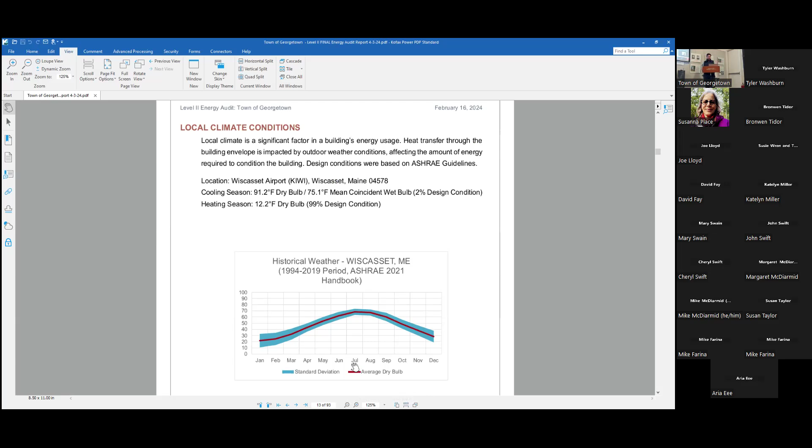Next section of our report is all existing conditions. So this is what kind of takes the longest to figure out, is what's there. We try to recommend things that are practical. So we don't want to recommend something that can't be built or can't be done. So that's our view. So we look at this as if when we do the energy audit, even though it's not engineering design, we look at it as if we were the engineer, could we do this here? Would the system work for you?

So we did this. I will go through this relatively quickly, but we looked at everything that uses energy. This wasn't really a resiliency study, so we didn't look at that side of things. And I think some of you may have some questions about that, which is great. But this was really focused on energy use.

So here's all your systems, and this is how they're controlled - heating, cooling, domestic hot water, looking at the town offices. We're looking here at some hallways, classrooms, unit heater spaces. We went all throughout the building.

This is down in the basement. We did go in the basement, spent some time down there. We figured out how the boiler plant works and how it's controlled.

There are many things that can be done with controls to help energy use. The good news is you've done them already. It doesn't let me put it in my report if you've done it already, but it's great for the town. So it's great that you guys are doing that.

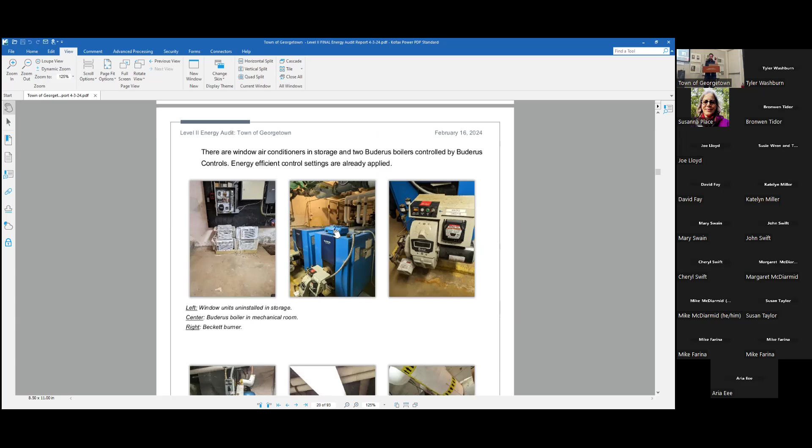This little guy, you can see my mouse - this little blue box on top of the boiler is the control. That's the brain. So we opened that up, looked at the LCD screen, clicked through all the menus and captured all the set points so we could understand how it was working.

We also took a list of equipment and we are able to give you guys model numbers and quantities if they're visible. Sometimes with the circulator pumps, the model was rubbed off, so we couldn't see what it said. But for the equipment we could see, we wanted you to have this. So if you are doing maintenance planning in the future, you can hand this report to a maintenance contractor and they can at least get a start.

We did the same thing for building envelope. I kind of skipped over this, but when we look at a building, we look at it as a whole system. So we're looking at the mechanical systems - heating, cooling, ventilation. We're looking at building envelope, which is really insulation, air sealing, stuff like that. We also look at...

lighting that uses energy. We look at the pump motors and we look at water and sewer. Now, in your case where you are on wells with septic systems, there's not cost savings from doing water and sewer. So we didn't go too far down that road, but we did look at it.

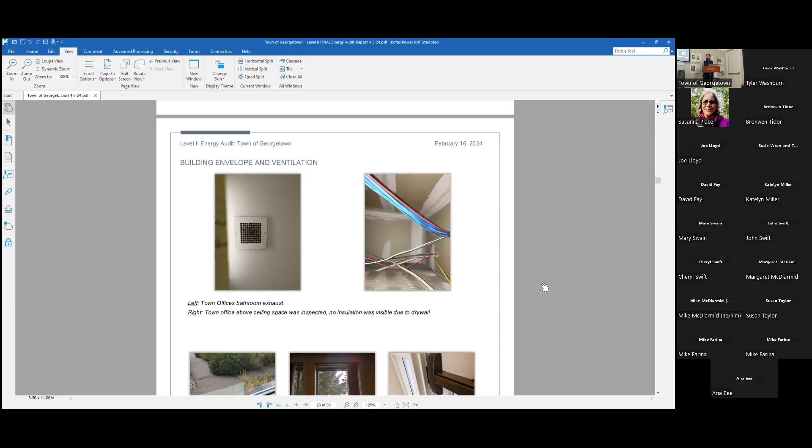We looked at all the windows. We went up in the attic. You've got blown-in insulation. Your ducts are insulated - that's a good thing.

Looking here in electrical works. And again, here's your list of equipment.

Lighting - we did a lighting survey, so I'll skip to the end here because you don't want to look at a bunch of pictures of lights, there's a million of them. But here's the lighting that was in the building. We counted them all. I'm not going to say we couldn't have missed one or double counted somewhere - it's pretty hard to count lights, but this is our best effort at doing it.

Water and sewer, as you can see, we looked at that, but I already mentioned why that wasn't a huge priority, just due to costs.

So we did the same thing at the community center. This had a little more exciting findings around envelope. Here's how the building is heated.

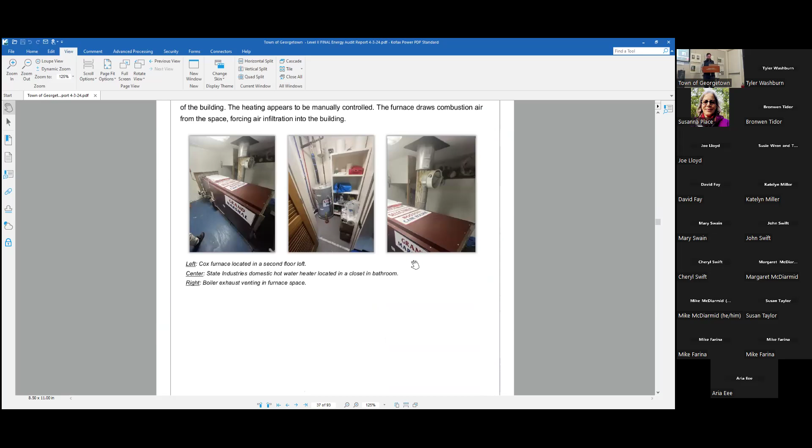For those of you that have been in the building, we've got this oil furnace that just blasts out heat - and that's actually kind of good for the way you use that building, where it's not occupied all the time. Having a big system that can heat up the building quickly when you use it is good. If that building were occupied regular office hours or even 24/7, that wouldn't be the best system because it's not the most efficient.

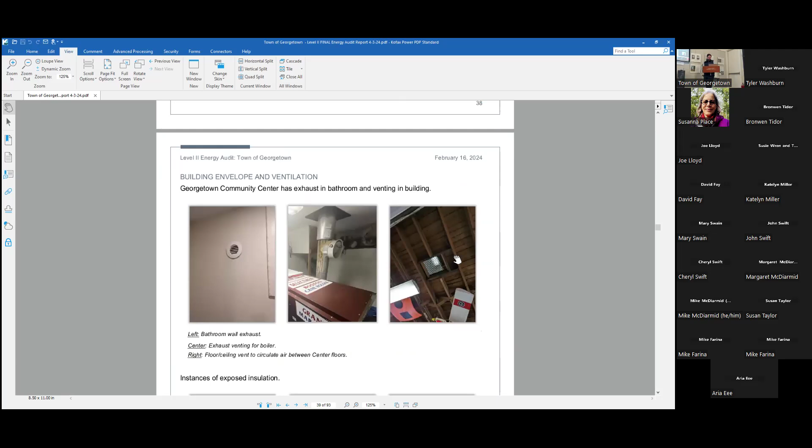Building envelope here - so we found some areas that we got the vent in the floor that lets the heat go upstairs. We did find, let's see if I can find it.

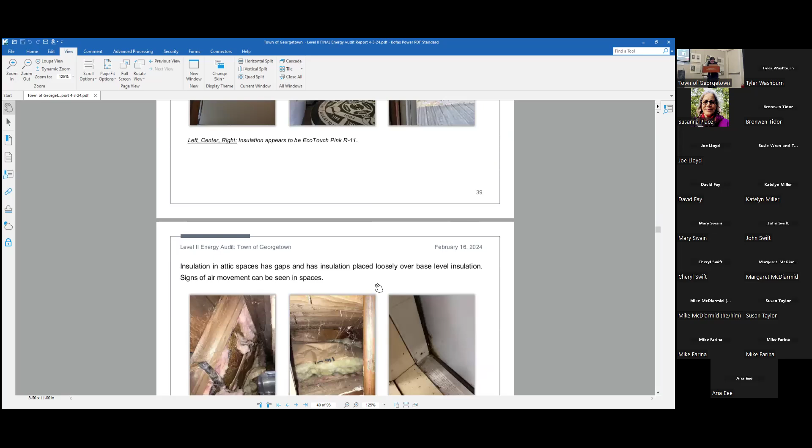Yeah, here we go. This is what I want to show you because you can use this on your house too. So here's some shots. This is a gambrel building, I would call it, or maybe you would say this is the inside of that gambrel roof. Okay, what we're looking at, that's the stud there that holds it up. And here's the insulation, and this is sort of the passage into there. You can see in the photo the cobwebs in there. So anytime - now that's nothing against cleanliness.

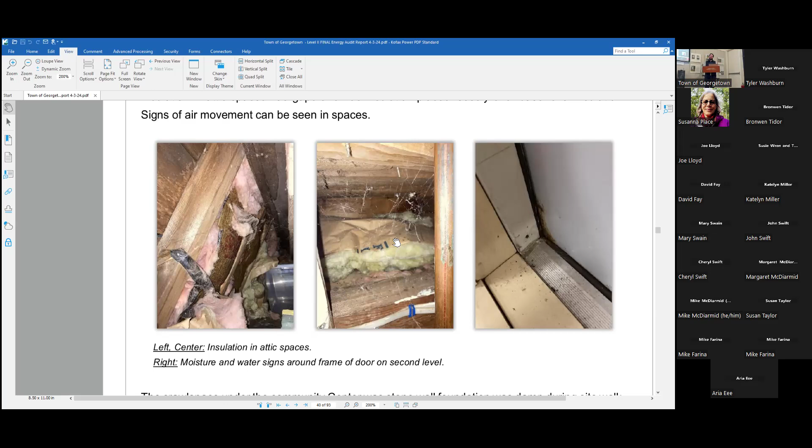I have cobwebs in my house, so I'm not being judgmental. But what I want to share with you is if you see a cobweb, it means air is moving. Spiders are lazy and they build their webs in areas where air moves, because that's where the flies go and then they eat them. So anytime you see a cobweb walking around your basement, it means air is moving there. That's something we can choose to stop or not.

But we did find it, and I just wanted to point that out. I thought that was cool. For my job, that's cool. So maybe you're not excited, but I am.

That was pretty neat. Again, equipment surveys, lighting. We did a lighting survey at all the buildings. I'll scroll through that, and here you go. So here's our lighting counts. This one was complicated, there's lots of different types of lighting in a community center.

Water and sewer, we looked at that as well. Existing conditions, so here's the fire department building.

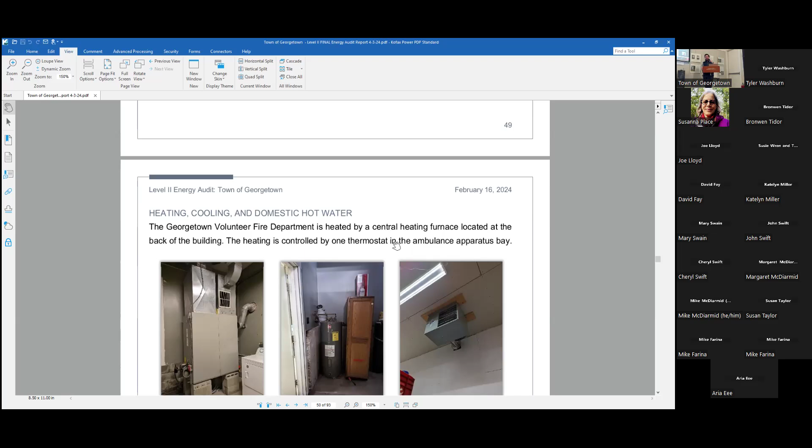You'll notice these are all in the same order, they're all presented the same way. That's done on purpose, so as you're flying through the report you can jump sections. You can look at it however you want, but everything will be ordered the same way. And the order the buildings are presented at the beginning of the report for each chart is also the same order that they're in the report. So we tried to be very consistent with that intentionally for ease of use.

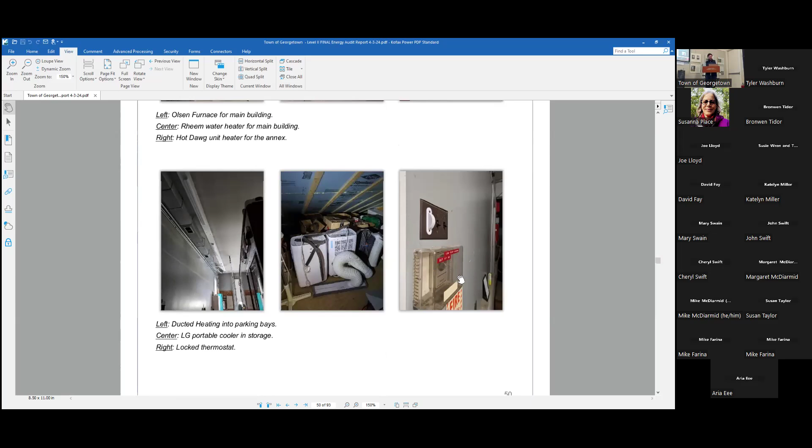So here's your heating systems, hot water systems. Here's the control, I love this, that lock, don't touch it. I used to be a firefighter, I know firefighters mess with stuff.

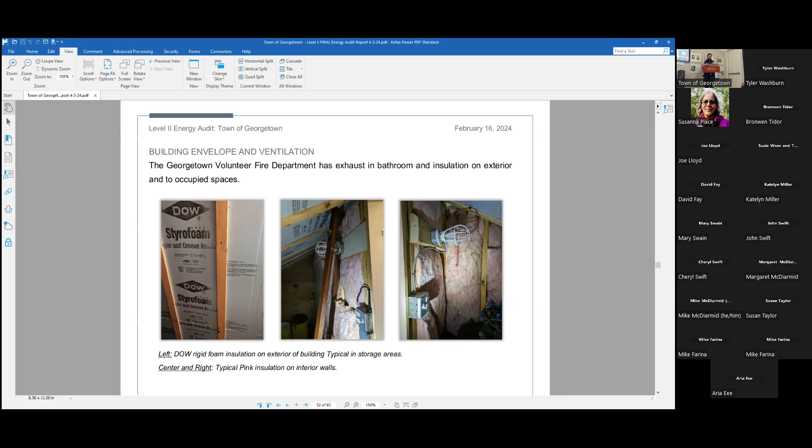So I just got a kick out of that. Here's your equipment survey, building envelope and ventilation. This is a little bit more advanced here. You can see we've got some rigid foam in here. We still have some pink insulation. Pink and yellow insulation, they're both fiberglass, they both do the same thing. So you might have noticed in the other building it was yellow, in this building it's pink. It's still fiberglass, it still does the same thing.

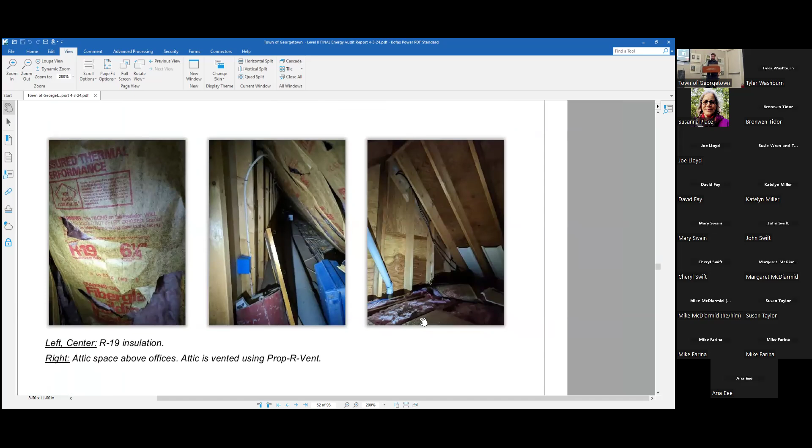All right, here's a good thing I'll point out. We want attics to be vented. So where my mouse is here, this floor space, that's what we'd consider the thermal barrier. It's really the back side of the ceiling below, and that means this space is allowed to be cold and allowed to be hot, and that's what you want. These Prop-R-Vents go down outside of the building and direct the fresh air up the roof. If that's not done, insulation can get blown around and the system just doesn't work as well. So that was a good finding.

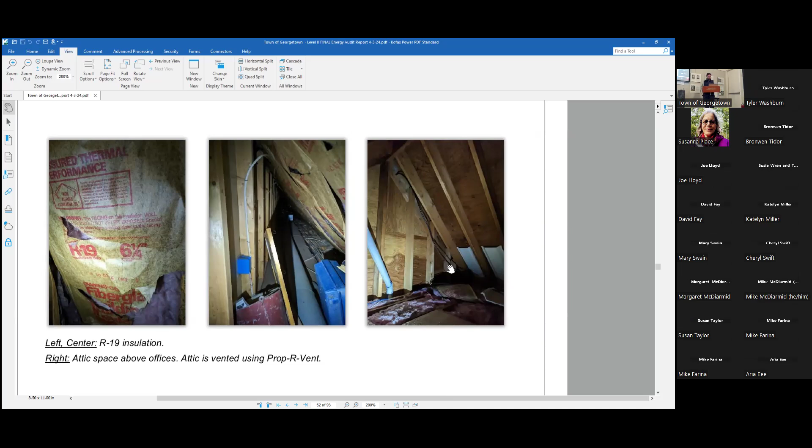Oh good, another one, another life lesson. So we got our pink insulation, we pulled this up, so it wasn't sticking up like that, we pulled it up so we could look at it. You'll notice the bottom of the insulation is dirty, and again, no judgments here, the insulation is dirty in my house too. But insulation is an awesome air filter. So if you see dirty insulation or cobwebs, it means air movement, anywhere you go.

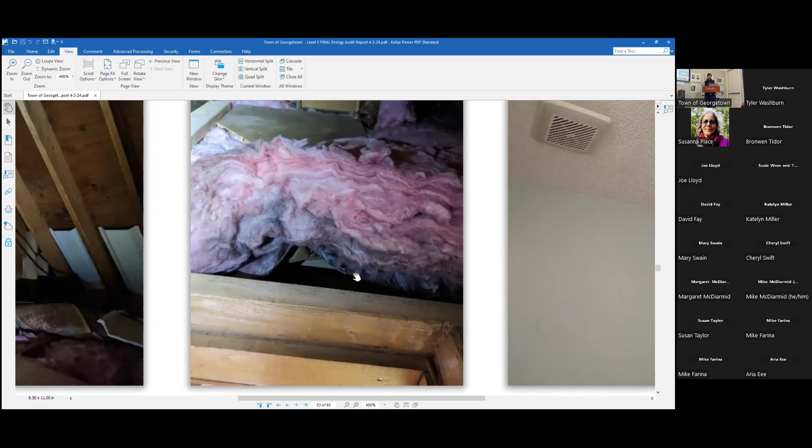We're done with this, you guys won't need me anymore, you'll be doing your own energy audits. So there you go.

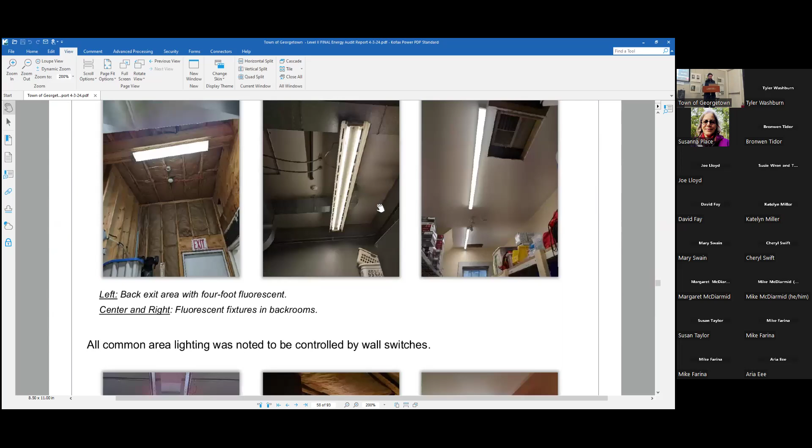We took a picture, we looked at all the appliances, we looked at water and sewer. We also looked at the annex building. Here's your equipment survey, lighting. Again, I'll roll through this pretty quickly, but we took pictures of the lighting, did the lighting survey, and there's our photos of the annex. That was a pretty simple building. And here we've got our lighting survey, let me zoom out a little bit so you can see better. Water and sewer.

We'll hear a lot about electrification, and full disclosure, I drive an electric car, I have heat pumps in my house, I'm a true believer. But electricity is a more expensive fuel than a lot of other fuels.

Now, the reason that's okay is because it's also, if you're using heat pump technology, or an electric car versus a gas car, it's way more efficient. A gas engine might get you 20% of the energy that's in the gasoline you're going to use. An electric motor is going to be closer to 100%, 98, 99% efficient. And with heat pumps, they tend to be - well, the sales guy will tell you they're 3 to 4 times as efficient. The reality is the efficiency of a heat pump changes with the exterior temperature.

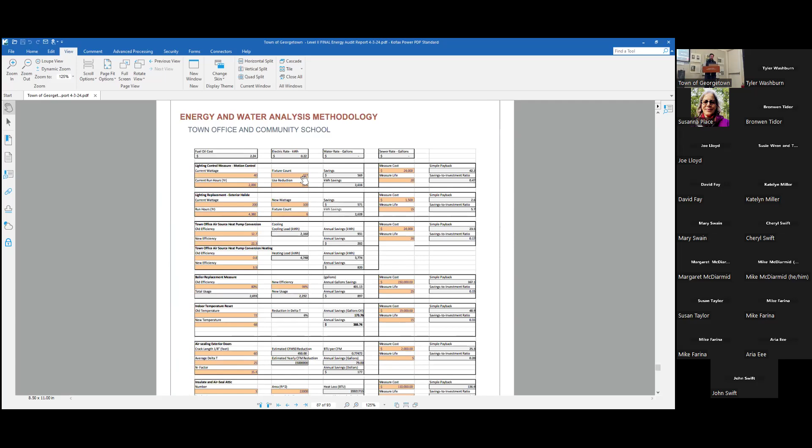The cells that are orange are inputs, the cells that are gray are outputs. This is how we calculated all the measures and savings. You can see all of our assumptions. There aren't very many assumptions made because we had a lot of data. We went around, counted all the lights, looked at the efficiencies of the equipment, but it's all in here if you're ever curious and want to look.

Our final appendix here, this is the utility data that was provided to us that we used for this, and that's the end. So now what I'd like to do is go back

to these charts, and we can go by each building. We recommended some lighting, heat pumps, a boiler replacement, indoor temperature reset we can talk about if you're interested, air sealing of exterior doors. We noticed the weather stripping had gone bad, insulating and air sealing the attic, and then again, more lighting.

At the community center, unfortunately we recommended very few things. The usage at the community center is very low because it's used pretty much one day a week. And that's all there is to it, I guess. I don't have much to say about that.

Fire station annex, there is more activity at the fire station, so we had a few things here. Looking at lighting, putting in air source heat pumps, furnace replacement - those are somewhat mutually exclusive. I would maybe do one or the other, or you could keep your furnace and use the air source heat pumps to supplement, that would also be okay. And a refrigerator replacement - the refrigerator in there, I'm sure you guys would like a new fridge.

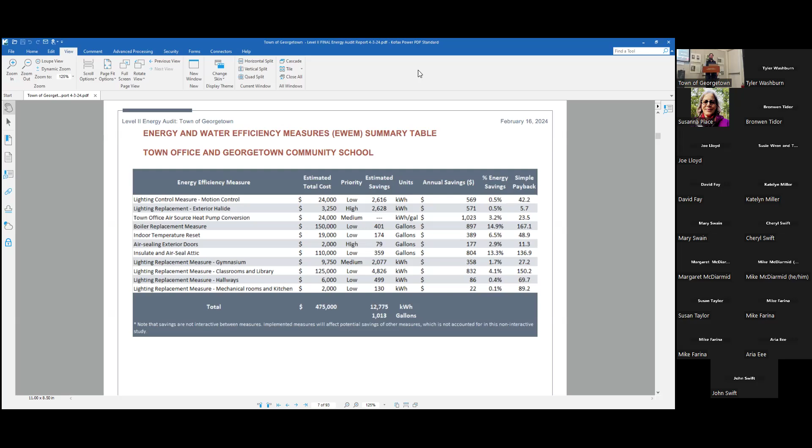So the question was, can we look at the fire department measures in particular? We've recommended a refrigerator replacement, furnace replacement, air source heat pump conversion, and then lighting replacements in the apparatus bay. We did find some incandescent lighting, which is pretty amazing - you can't buy that, haven't been able to buy that for quite a while. So good job being efficient with your lights and not using them, they haven't burned out yet. And exterior lighting replacement - what do you recommend for the apparatus bay lighting replacement?

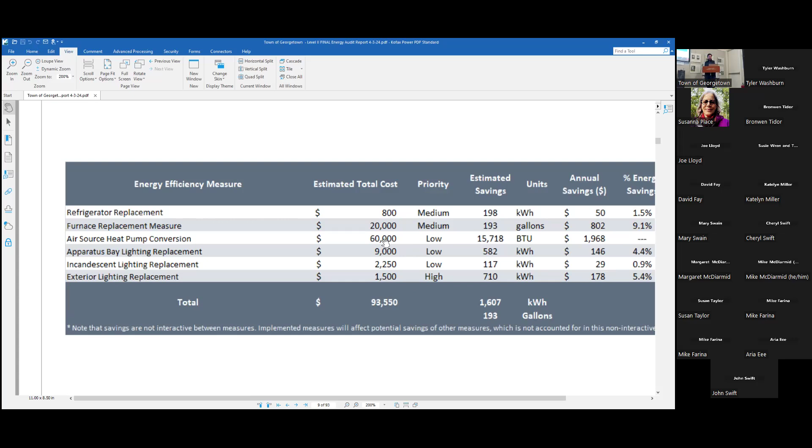All right, let's check that one out. Specifically your problem. Yep, let's look at it. So let me just scroll down to that measure, it'll take me a minute. I'm gonna move my... Zoom stuff is kind of in the way here. Just a sec.

Community center, fire department, apparatus bays - replace all apparatus bay lighting with either screw-in or permanent LED fixtures. Design Lights Consortium, which is DLC, and Energy Star are both organizations.

Can't read it, can you pull that up? You got it. Absolutely, I was just reading what it said.

Okay, well the question I guess I've got specifically is in all the apparatus bays themselves, we replaced all that lighting a couple of years ago, it's all LEDs. I don't think so, it looks like... Yeah, I believe you, but when we looked at it, it looked like fluorescent to us. If it is LED, then yeah, we didn't get up on a ladder. The covers on it make it look like an old school fluorescent. I gotcha, yeah, well don't do that measure then. Thank you.

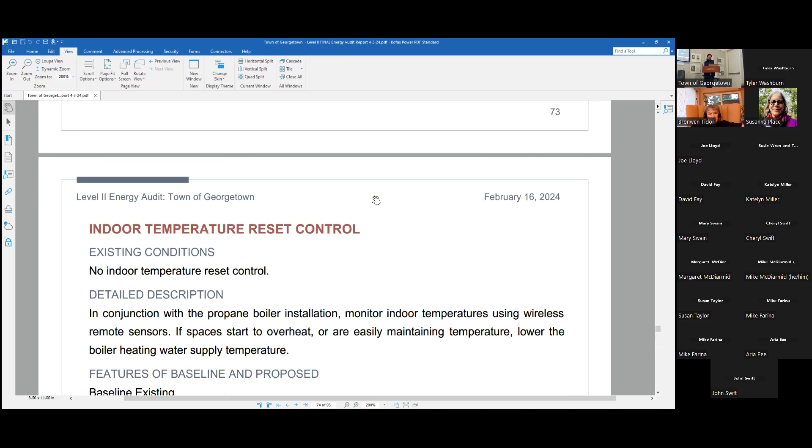Yeah, let's look at that, because it's definitely not - I believe you on the apparatus bays because I didn't go up there on a ladder and look at them, but let's look at the existing conditions, because we got photos of non-LED lights.

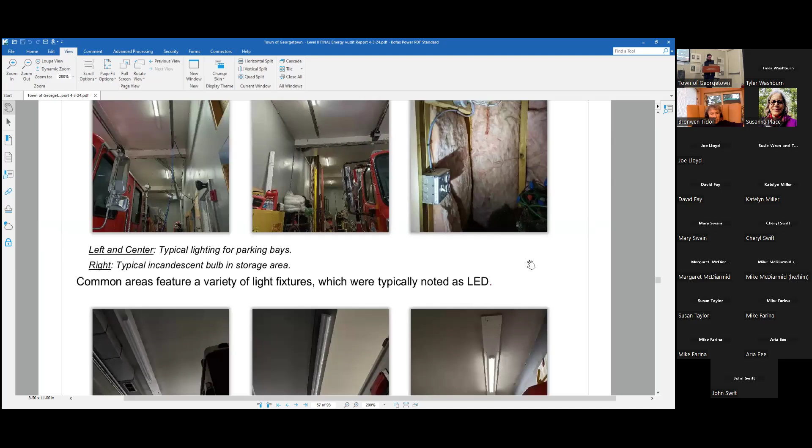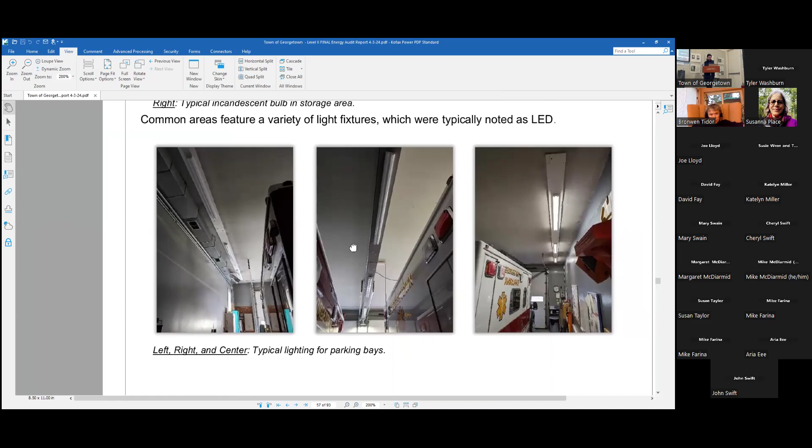So these are the LEDs you're talking about here? Yeah, okay. So right here in the attic, that's not an LED. No, that's - no, just in the bays. Right, but well, you said everywhere, so this is a fluorescent light. I mean, the number of non-LED lights in the station is very small. Okay, well we should replace those. Here's a fluorescent light right here, here's an example of one.

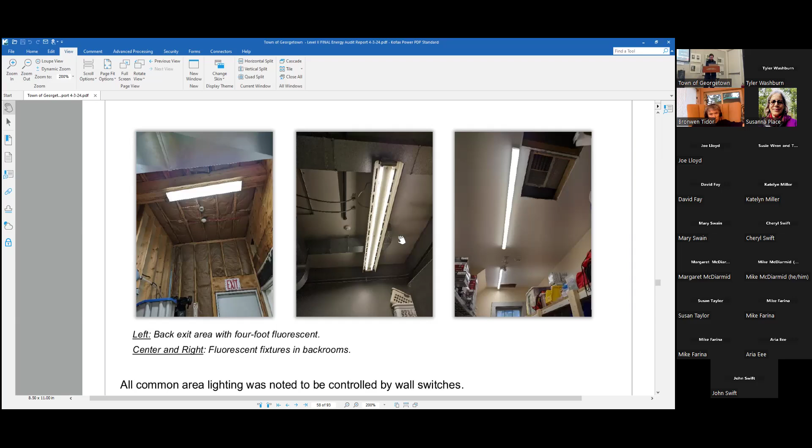This is non-LED, this is also non-LED. No, sorry, that center thing is an LED. Not that one, the one on the left. That one? Yeah, okay.

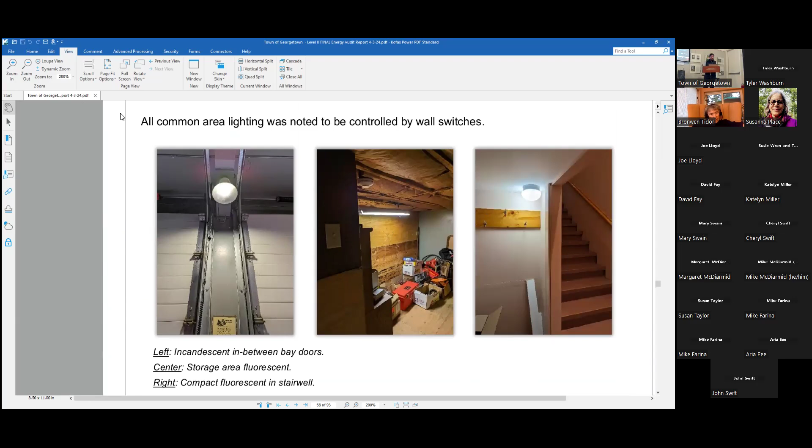All right, fair enough. Thank you. Other questions about the fire department measures? Let me go back up to that.

I have a general request. Could people who are in the room and speaking please identify themselves? Because all we're seeing on the screen is those of us who are reporting. Zooming in, it's garbled and we have no way of knowing who's speaking. Your presentation is very clear, but especially because this is being recorded, I think it's important to identify the people who are speaking and know what the conversation is about.

This is Bronwen Tidor speaking. I'm a select board member, and I want to thank you very much for this very interesting presentation of specifics in the report.

So I don't want to impede the questioning, but it's very frustrating not to be able to hear the whole question and not to know who is making the inquiry. Yes, thank you, I will do my best to repeat the question. What was your name, sir? Trebona, Bob Trebona was the questioner. So thank you, Bronwen. Thanks, Bob. And Joe.